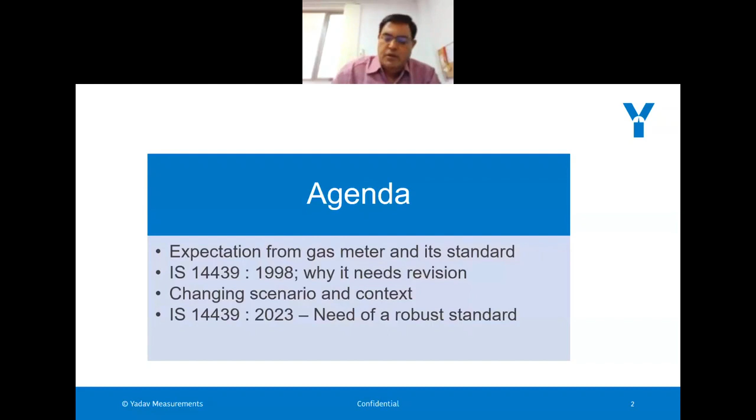Before doing that, a brief introduction of my organization, Yadav Measurements. We are an NABL and UKAS accredited test and calibration laboratory. NABL, as most of you know, is the apex body for accrediting test and calibration laboratories in our country, and UKAS is the United Kingdom Accreditation Service. We are the only laboratory accredited by UKAS for electricity meters, gas meters, and various test facilities. And we are a BIS recognized laboratory for electricity meters and gas meters as per Indian standards.

To the best of my knowledge, we are the only laboratory recognized by the Bureau of Indian Standards for IS 14439. And we are recognized by various electricity regulators. We are based in Udaipur. We have a lot of test facilities for electricity meters, but I will not talk about those. We have EMI/EMC test facilities, environmental test facilities, climatic test facilities, mechanical and all those things.

But here, for the benefit of all attendees, I would like to say that we have extensive test facilities for calibration and testing of gas meters. We can test for accuracy meters from G1.6 to G1600. I will show you some of the test facilities. We can test all types of meters as per EN 1359:2017, and all these test facilities are accredited by NABL and the United Kingdom Accreditation Service, so the test certificates issued by our laboratory are acceptable not only in India but worldwide.

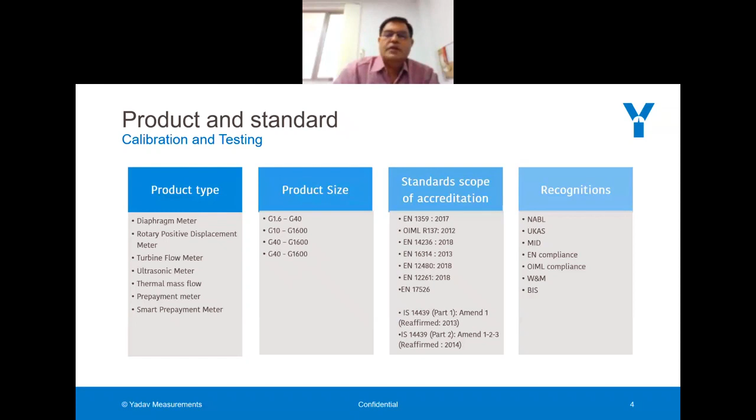We are accredited for EN 1359, OIML, EN 14236, even the latest standard EN 17526, which is for thermal mass meters for the European body. So our test certificates can be used for getting various certifications by manufacturers, CGDs or any other stakeholders. These are some of our facilities.

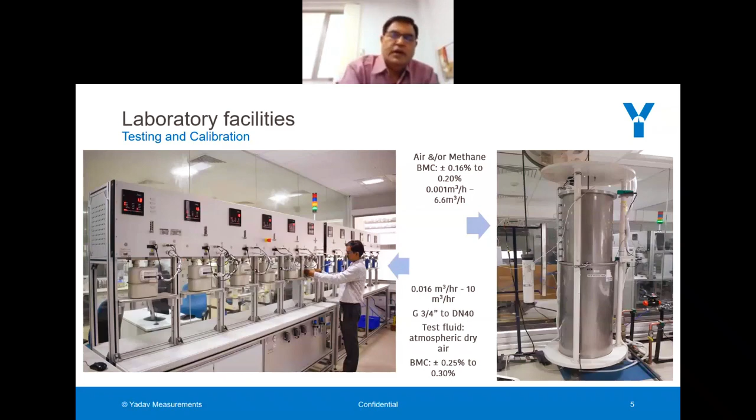We also have another test bench which can test meters up to G1600. Means you can test the accuracy of meters up to 2500 cubic meters per hour with an accuracy of plus minus 0.2 to 0.3%. One of the best facilities we have in India. And I would also like to add that we are the exclusive partner of Itron, now known as Dresser, for repair and calibration of gas meters in India.

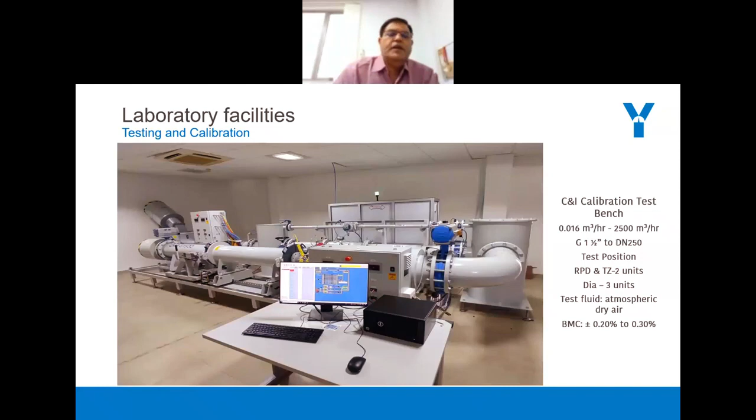So with this background, I would like to go to the original subject of the gas meter standards. I will start with what different stakeholders actually expect, because the standard should meet the expectation of all stakeholders, be it manufacturers, be it CGDs, be it users, be it regulators, or be it consumer forums. So what the stakeholders expect from the gas meters.

First thing is it should be reliable, robust under various stresses. A gas meter has to work continuously, unattended, 24 hours, because the gas can be used by the user anytime. So it should be always working 24 hours unattended, and mostly people will expect that it will work without any problem for at least 10 years.

Accuracy. Today, we are using mostly class 1.5, but people will expect more accuracy. And also what we need to note is that gas meter accuracies are not only the direct accuracies, but they are affected by temperature and pressure. So that also has to be considered when we talk about accuracy of the meter.

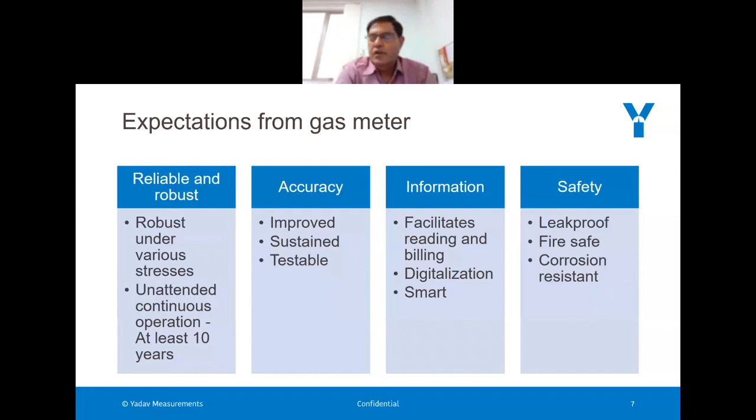And safety, of course, is the basic requirement. The gas meter has to be leak proof, it has to be fire safe, and it has to be corrosion resistant, because meters are installed in different environments.

So with this background of expectations from different stakeholders, we are making new standards. The standard should support mass manufacturing; it should not prohibit manufacturing. It should support mass installation, so installation should be easy and standardized. It should meet requirements of reliability, safety, sustained accuracy, easy reading and billing, and easy installation.

It should be suitable for the Indian environment. Very, very important, because India is a country with a wide range of climatic conditions. From Jammu Kashmir to Tamil Nadu, east to west and north to south, we have different climatic environments, and our standard is applicable all over.

And as we were talking about digitalization, the standard should be unambiguous. Many times we find ambiguous requirements given in the standard. So we should ensure the standard is unambiguous so that variability is as minimal as possible, and the interpretation should be clear. Testing and certification methods should be well defined. Acceptance criteria should be well defined. Type test, acceptance test and routine test should be part of the standard.

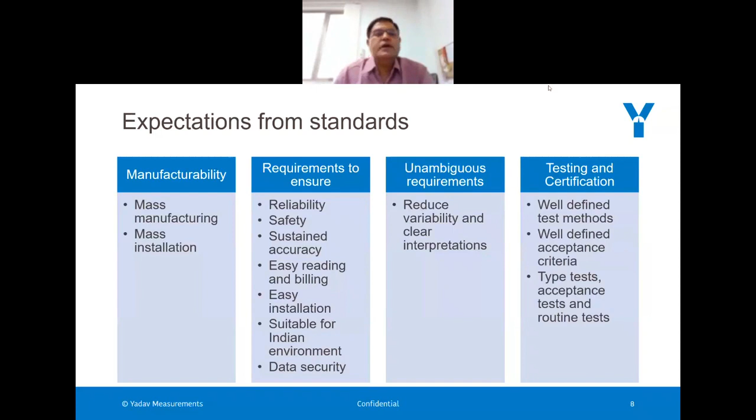Now, just a few minutes on the old standard IS 14439, which was made in 1997 or 1998. Of course, this is an old standard. It was based on OIML R6 1989. Maybe at that point of time, this was the standard for gas meters. It only covers class 1.5.

Digitalization and communication technologies were not a need at that point of time, so they are not covered. No additional functionality requirements are given. Starting flow rate is not defined in the standard. And the temperature range defined in the existing standard, in fact this is not an old standard, it is at present the valid standard, is -10 to 40 degrees centigrade.

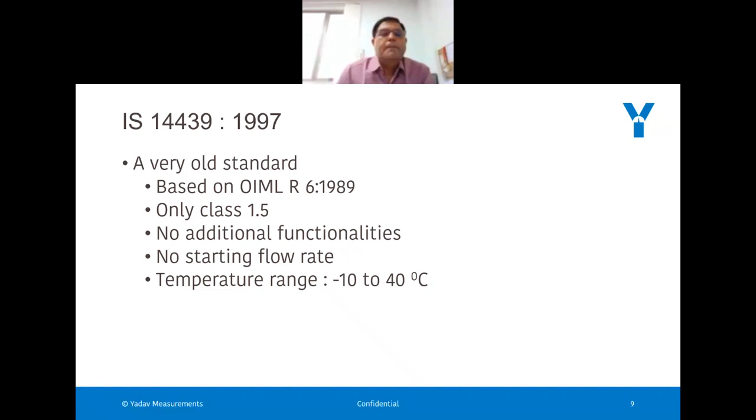Now, what is the changing scenario? As I told you, information and communication technology is required nowadays in all aspects of life. The testing methods have changed since 1997 or 98; they have improved in terms of repeatability, measurement techniques, and accuracies. So new testing methods have come up, and we need to incorporate all these new testing methods in our upcoming standard.

It should support mass scale manufacturing and installations. It should meet regulatory requirements like PNGRB or any other regulations. What does industry expect? Industry expects that it would be integrated easily with information technology infrastructure, with better accuracy and robustness.

Like CGD wants that as accurate as possible, and the meter should be working long duration, at least 10 years, quick reading and billing, so that the finances of the CGDs are quickly recovered. At present, we are doing postpaid billing. So postpaid billing means the CGD is getting the money after supplying the gas, maybe after 2 months. So today, if I am using gas, I will be paying after one month or 2 months or 3 months.

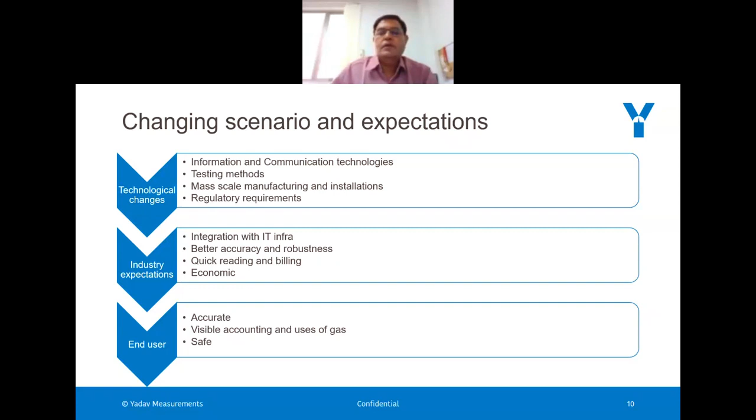Coming to the draft standard which the PGD 26 has made, I would like to make a disclaimer here once again that this is at present a draft standard, and whatever I am talking about is subject to change because a few more discussions will happen on this standard. So some new things might come into the standard and some things might change from whatever I am presenting here. But I am sure that BIS has a process for circulating the standard before publishing it. So it will go to wide circulation and all stakeholders and all members who are attending this presentation can view the standard and give their comments.

So this standard which PGD 26 is making is based on the latest European norm EN 1359. Guidance has been taken from EN 1359:2017, also from OIML, the International Organization of Legal Metrology, OIML R137 document. Also, for additional functionality requirements, guidance has been taken from European norm EN 16314. And of course, I am also a member of the committee making these standards, and a lot of highly experienced people from different sectors are part of this committee, and they are giving their best to make this standard as good as possible.

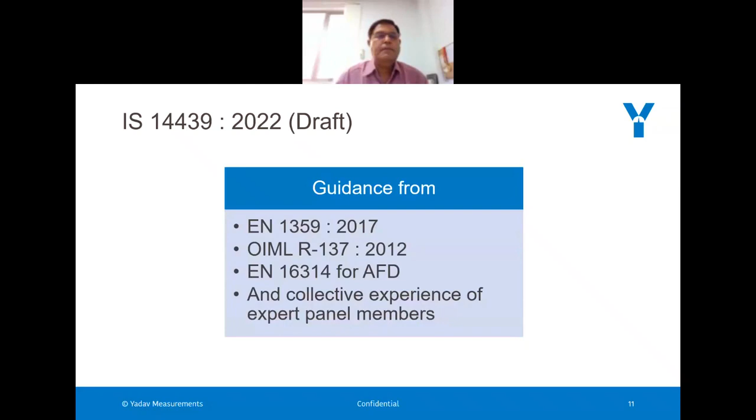So I will give a brief on the new requirements as compared to the existing IS 14439. We are adding starting flow rate, and as I have interacted with a few CGDs, they have complained that with existing meters, when people are using them at very low flow rate, they are actually not recording the volume. The consumer is using the gas, but the meter is not recording the volume. So a starting flow rate should be required. Once you define the starting flow rate, the meter design will be required to measure some minimum flow rate. So that is one of the requirements we are adding.

We are adding influences of other devices, since, as I told, the meter will have a lot of additional functionalities, and how they can influence the performance of the meter. Resistance to high ambient temperature, because sometimes there can be a fire in the building, in a home. Even in that case, the meter should not leak, it should not aid the fire. So that is the requirement. Resistance to heat, a high ambient temperature, is proposed to be added.

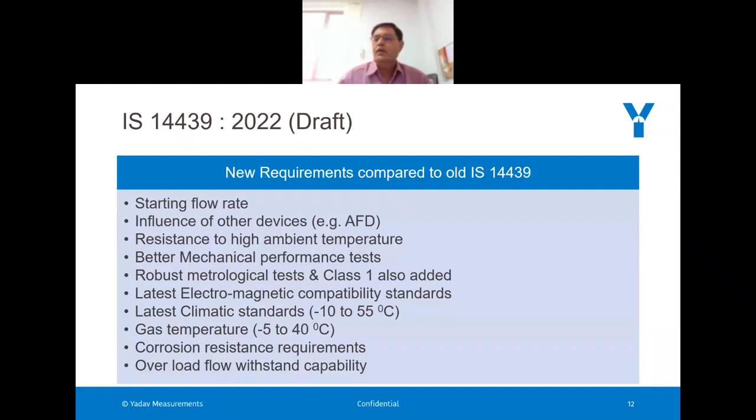So coming to the corrosion resistance requirement, we are adding the requirement scratch resistance of the protective coating, the adhesion of the protective coating, how strong is the adhesion of the protective coating, impact resistance of the protective coating, chemical resistance of the protective coating, resistance to salt spray, resistance to humidity, and resistance to storage temperature. So all these tests, all these requirements, it is proposed to add in the standard, so that the meter has very good internal and external resistance to corrosion.

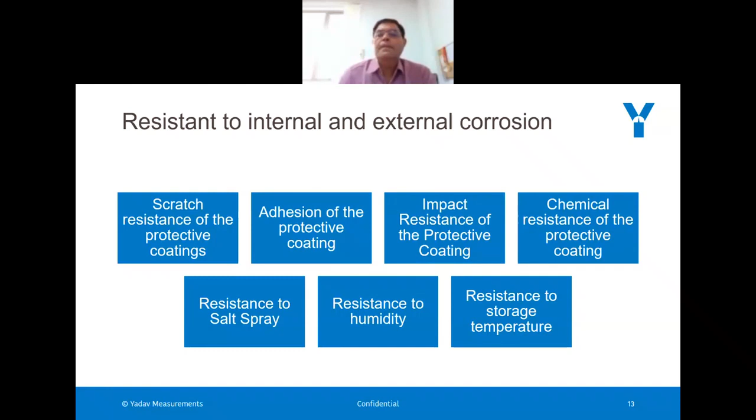As far as mechanical requirement is concerned, we are adding robustness of the meter case, which is very important. Meter case should be very safe. There should not be any leak. So external leak tightness test, resistance to internal pressure, and sealing requirements.

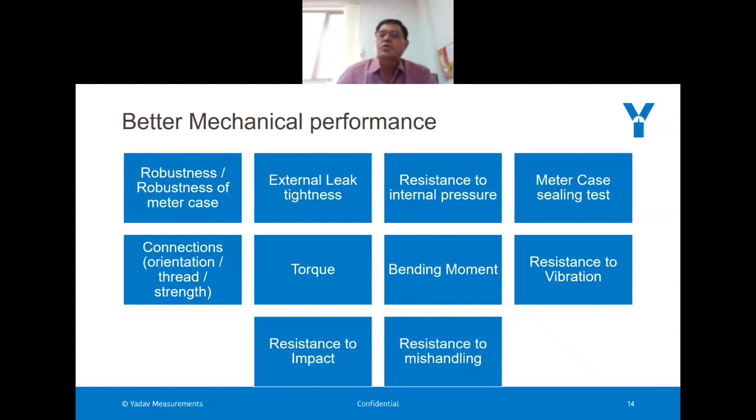Also, there are requirements related to the connections, because sometimes there can be a leak from the connections. So tests for the connections are also being added, in terms of thread strength, in terms of torque, in terms of bending moment, and of course resistance to vibration, resistance to impact, and resistance to mishandling, which is basically a drop test.

As I told earlier, we are adding a requirement which is named as additional functionality requirement, and these additional functionality requirements will actually support the integration with digitalization and make it smart. So there are three types of additional functionalities defined, which are called AFD1, AFD2, and AFD3.

As you can see, AFD1 is basically the additional functionalities which are an integrated part of the gas meters. AFD2 is additional functionalities which are attached to the gas meters, and they can be removed; they are integrated along with the gas meter, but they can be separately identified. And AFD3 is a type of additional functionality where there are two different blocks, two different identities of the additional functionalities.

And these additional functionalities requirements will support prepayment functions, which will be very useful for the consumer and for the CGD also. It will support software security and firmware upgrades. If these are smart gas meters, it will support tariff management and battery management.

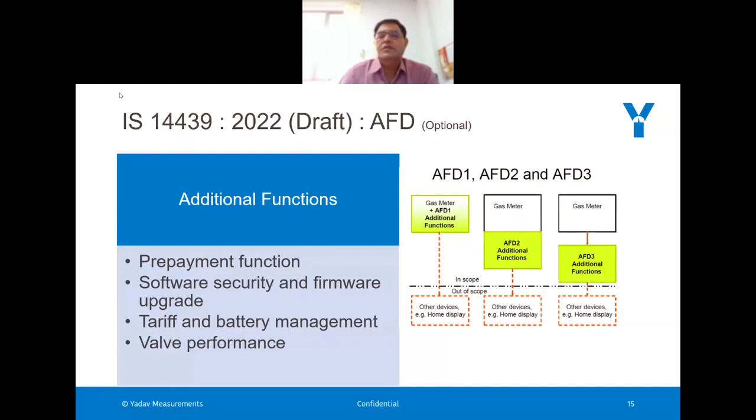And also, because prepayment function will require a sort of valve, this valve can be shut off and shut on depending on whether the payment is pending from the consumer or not. So the valve performance becomes very, very important. So this is about additional functionalities.

And of course, a lot of new test methods, improved test methods, because as I told, sustained performance is required. So we are adding tests related to aging, related to environment. So the meter will be required to work continuously at high temperatures. Meter durability test: if continuously there is a flow and the flow rate is changing, whether the performance of the meter is getting affected.

Salt spray test. Metrologically, we are adding weighted mean of error for the full range to ensure that the meter's accuracy is controlled not only at a particular flow rate, but for the full range. We are trying to ensure that the tolerances and acceptance criteria are well defined, and of course there are many more improvements compared to IS 14439:1997.

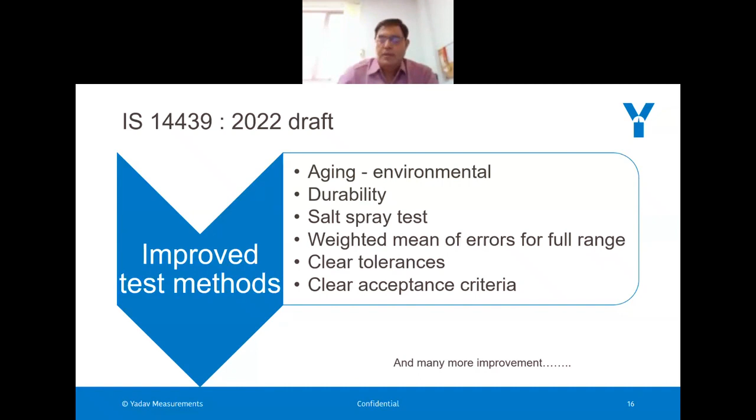So this is about this, and what we expect from all of you, those who are members of PGD 26 and those who are not members of PGD 26: we want that you all go through this draft standard, which I'm sure will be circulated by the Bureau of Indian Standards, and provide all the comments. On behalf of BIS, I would like to mention that all your comments will be duly deliberated by the committee and considered for the improvement of the standard.

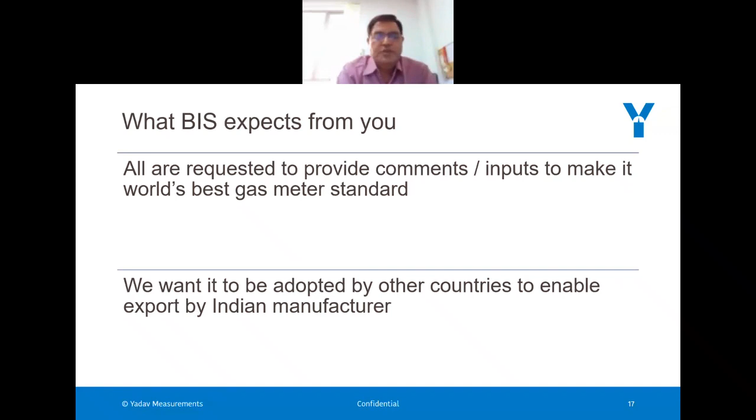What we want is that the standard which we are making is one of the best in the world, and that our standard published by the Bureau of Indian Standards is not only used in our country but is used by other countries, which will enable not only Make in India but also export by Indian manufacturers. So thank you very much, and I'm sure we will be able to publish a very good standard. Thank you.

Thank you very much, sir. You have very beautifully summed up the changes that we are incorporating in the new version of the current standard. You have explained the expectations of the stakeholders from BIS as well as the expectations of BIS from the stakeholders. So what I wanted to tell all the stakeholders, you have already included in your slide. So thank you very much for that. And surely we will be able to reduce the shortcomings of the previous standard and publish a much better standard. So with that, I thank you for your presentation, and let's see